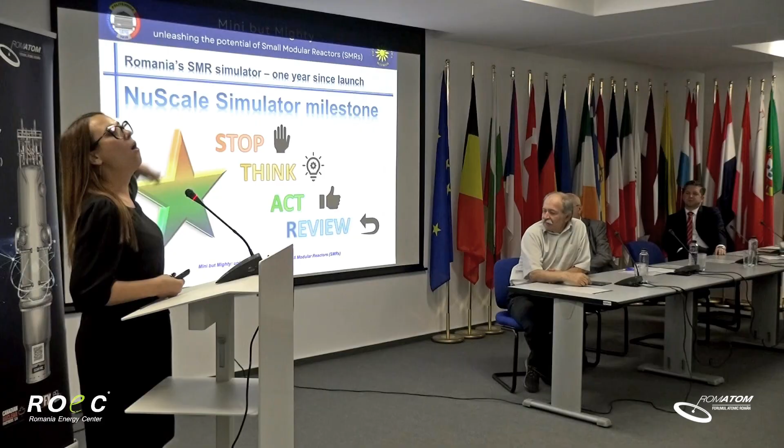We are currently reviewing what we've done well and what we've done in the wrong way, let's say. So we basically reviewed our courses. We also took some feedback from our students, and we are going right now from the beginning, also stopping, thinking, acting, and then reviewing again, doing this every year.

So what we've noticed after 1 year of using the simulator, we've seen some improved skills, so hard skills and also soft skills. The things that I will be talking about are based on our students' feedback. So on the reactor design, it's way easier to understand a new design, and not only a new design, a current design, like an operating design, if you work with the simulator with a real-time simulation environment.

Also, they improved their knowledge of thermohydraulics. It was really hard for us during the master courses. I personally teach RELAP/SCDAPSIM for master students. And I can tell you it's really hard for the students to get familiar with the code, get familiar with how to build an input model for simple thermohydraulic analysis. And now with the simulator, we have the opportunity to show them that their model and their results could be verified through the simulator.

Also, improved knowledge on safety, because the simulator is showing all those buttons that are the primary safety functions in the NuScale design. And every time we run a transient or an accident scenario, it's way easier to see in the simulator when a safety function is challenged. And one other thing is the fact that the simulation is basically the base of the knowledge, the base of the results that we got from, let's say, plant response. So these hard skills are way more improved than we saw in the previous generations.

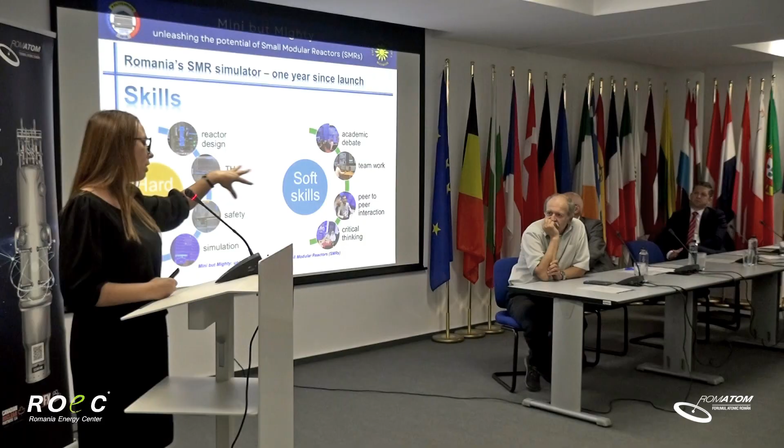Also, the soft skills. As you can see, there are some pictures from the simulator, pictures with our students. They were engaged in academic debates. They were also working as a team. We grouped them into groups of 4 or 5 people, and they worked together to solve an issue. They are also not very used to interacting with each other or learning from each other. So the simulator encouraged them to learn peer-to-peer, to learn from their peers. So it encourages peer-to-peer interaction and also critical thinking.

So the main conclusions after 1 year, based on, let's say, an estimation: we have an increased number of diploma projects focused on SMRs, mostly on the NuScale design since we have the simulator. Also, we've doubled our number of candidates for the nuclear engineering master program. And let me just underline something. When I was a candidate to the nuclear engineering program, we were like 15 candidates on 30 places to be enrolled in the nuclear engineering master program.

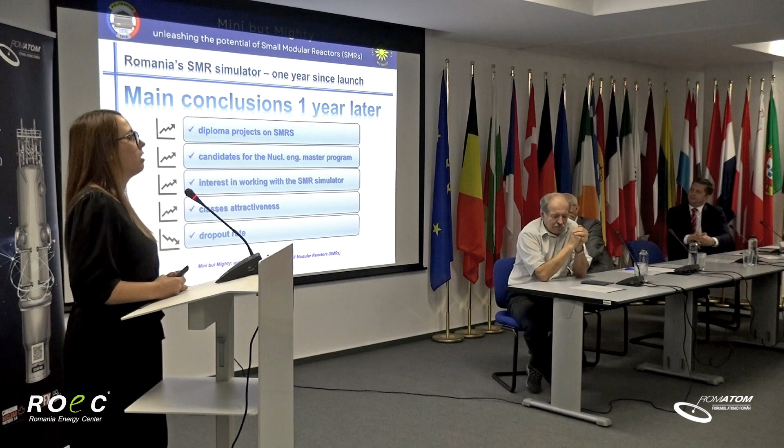So comparing 2022 to 2023 and 2024, we've doubled the number of candidates for the nuclear engineering master program. That's because of the simulator. So the interest of the students has increased for the nuclear engineering section due to the simulator.

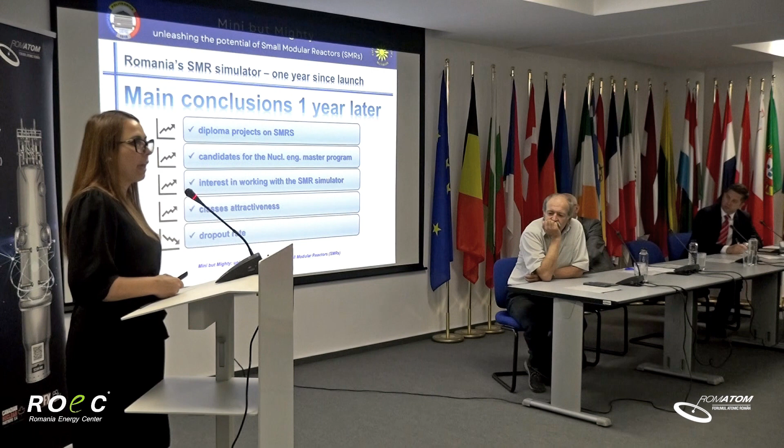Also, we've seen an increased interest in working with the simulator, and we are currently having one candidate for an entry engineer at Politehnica University in our nuclear engineering division. And also, we've seen that the class attractiveness has increased.

So we have an increased number of students participating in classes because, as you know, attendance is not mandatory. So they basically understand something like, well, classes are not mandatory, just the faculty if we want to finish the studies. So it doesn't matter if I go to classes or not. At the end, I just have to take the exams. But now we've seen that the presence at classes has increased.

Also, one very important thing is the fact that the dropout rate has decreased significantly. Let's say we were around 33 students in the nuclear engineering specialization in 2013, and we ended up on time, so basically defending our diploma at the end of the fourth year, around 13.

And now from the 60 students that we've got enrolled in 2024 in the fourth year, we have around 80% that are going to defend their undergraduate diploma. So the dropout rate has decreased significantly. So this is the main, let's say, overview on the last year regarding the simulator.

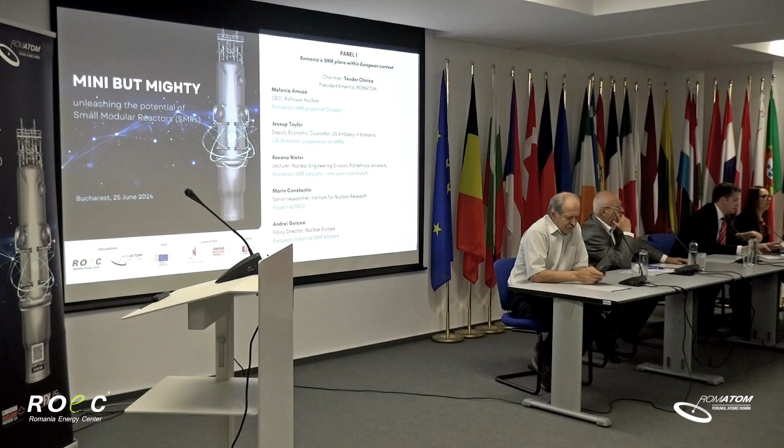We have to thank the Department of State of the United States. This was for Romania. For the future, that will depend on the purposes we are going to have. At this moment, we are looking at the terminal from Politehnica to RoPower headquarters. Just to clarify, the simulator itself was a donation, but the cost of bringing it and installing it came from the Department of State in Washington.

And also, just a side note that there are 4 NuScale simulators at universities in America, and there are 2 overseas, one here and one in Korea. The one here was the first one that was installed overseas.

And to catch up with your question regarding the improvements that will be done to the simulator in the United States, the NuScale company said that any improvement done to the United States simulator will also be available for Politehnica University. If you do not know about it, we are basically running the simulations through an internet connection, through a server in the United States, in Oregon. Thank you.

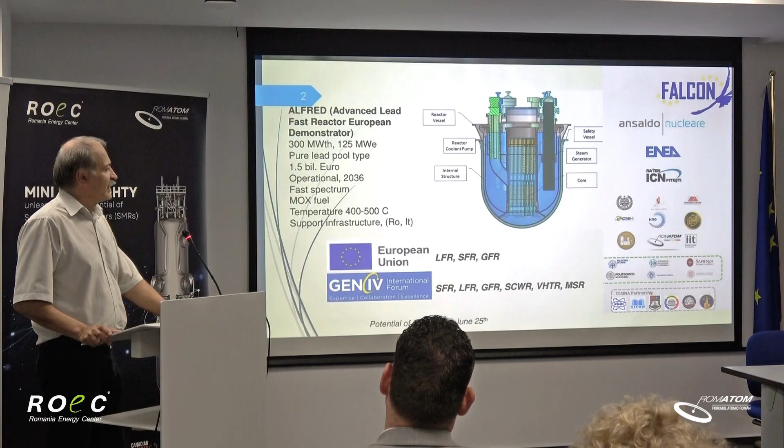We started this kind of activity in 2005, not for SMR first, but for lead-fast reactor technology. Lead-fast reactor technology was very important, and we received financing from the European Union due to the fact that we can burn the waste. This is very important, the minimization of the waste and solving a great issue of the nuclear. Therefore, we started to work in 2005 for a reactor of 600 electric megawatts. The name is ELSY. At that time it was the optimal size for the European grid, and later we were thinking, reflecting, and understanding that the SMR is not only a promising solution, but it is a very practical way to adapt to the changes in the grid and in the energy market.

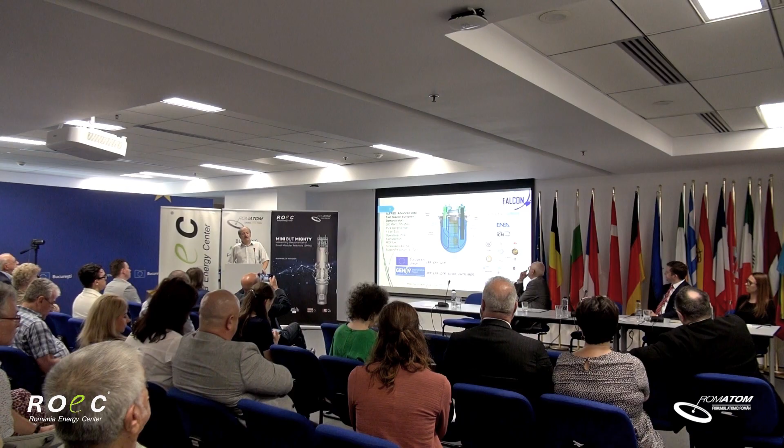What is ALFRED? ALFRED resulted from this effort as a demonstrator. We wanted to build a demonstrator for lead-fast reactor technology, and the demonstration was in terms of economic viability and technological viability. Therefore, the intention is to connect ALFRED to the grid, 125 electric megawatts. That is important, and it is in the size of SMR. And the total effort of this investment was estimated at that time at 1.5 billion euro.

From the point of view of the configuration, we have an integral type, like in integral PWR. That means we have a reactor vessel. The core is very small, less than 1 cubic meter of high enriched fuel. We used mixed oxide fuel, that means uranium and plutonium combined. And the steam generators and decay heat removal systems are directly inserted into the reactor vessel. That means a very simplified primary circuit without any pipes, reducing the risk for LOCA accident.

Comparing with the project from Doicesti, here we have a fast reactor. That means we are using fast neutrons. We don't need the moderator. And we use higher temperature. Actually, the reactor is designed to work between 400 and 500 Celsius degrees.

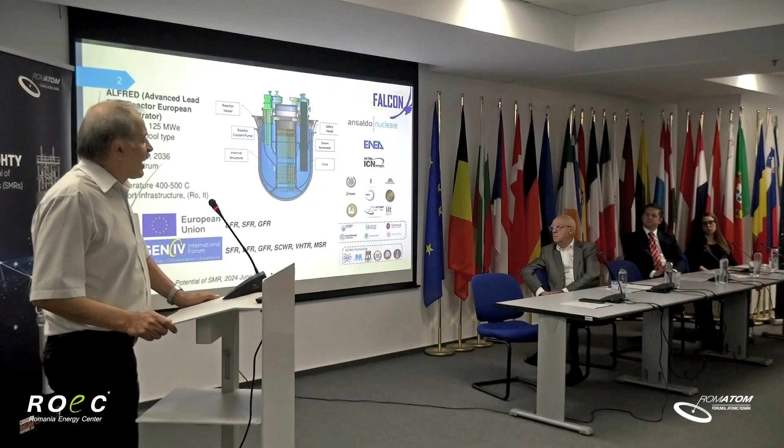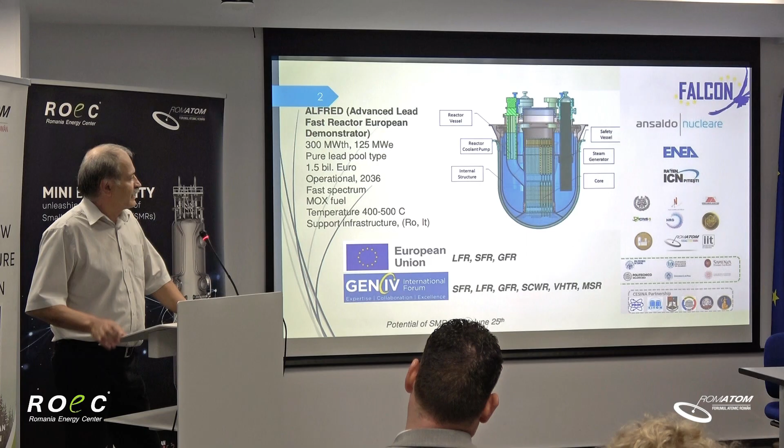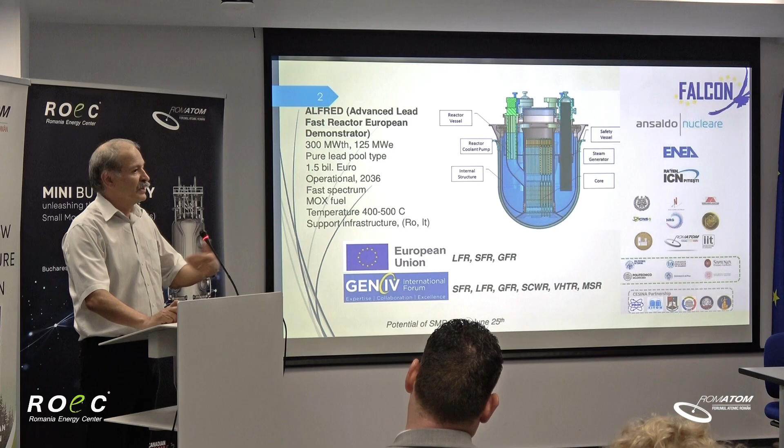We are working in an international context. We have an international consortium. The name is FALCON, Fostering ALFRED Construction. And we are 3 organizations, Ansaldo Nucleare and ENEA from Italy and RATEN ICN from Romania, in this consortium set up in 2013. We have important memoranda of understanding signed with different organizations. You can see here also ROMATOM in this collaboration, trying to collaborate with different partners to develop this technology. Also, we have good partnership with the universities because we try to involve universities in this long-term development.

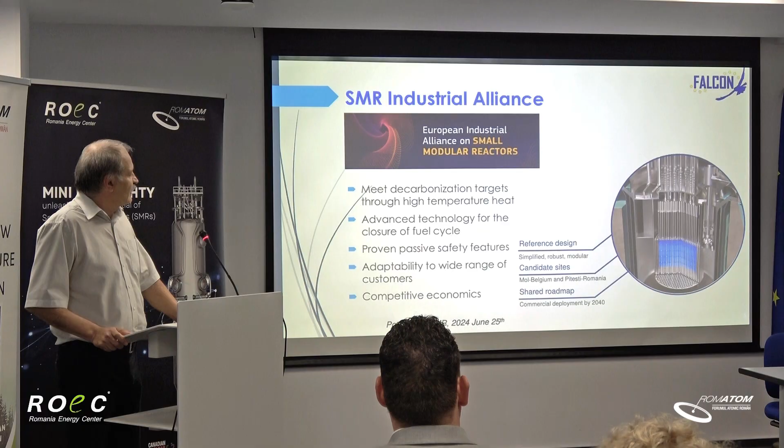Now, this year, we applied to the SMR Industrial Alliance and introduced our application, reference designed, simplified, robust, and modular, for this kind of LFR technology. And we have 2 candidate sites, one in Pitești in Romania for ALFRED, and the second one in Mol in Belgium for a precursor, a very small reactor to demonstrate the fuel part. The reactor for testing the fuel is around 5 megawatts.

Going further, in the last years we tried to enlarge this collaboration, bringing in Belgium. Belgium was deeply involved in the development of lead bismuth technology, which is very close to lead technology. They are involved in the MYRRHA project, which is directly oriented to partitioning and transmutation of the waste, but some changes in the governmental vision and roadmap offered the possibility to go to small modular reactors. Therefore, we decided 2 years ago to be together and put the money together for SMR development in LFR technology. At this moment, Belgium allocated an investment of around 100 million euro for the next 4 years.

And Romania, at the same time, has an important project to develop the infrastructure for the licensing. We are in the final phase for the first 2 important experimental facilities, ATHENA and ChemLab.

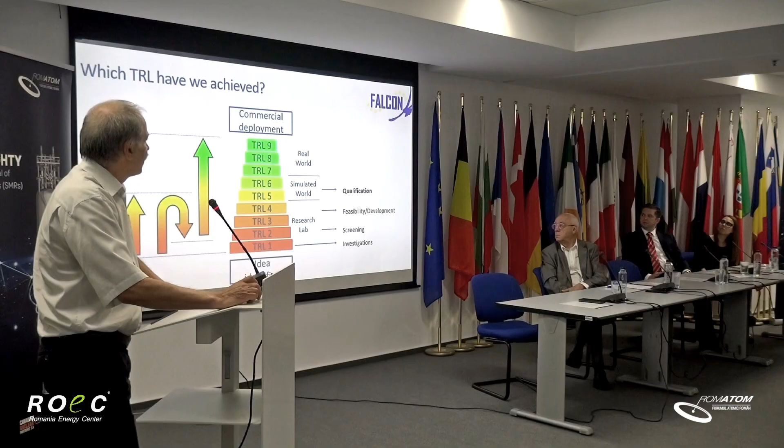In terms of technological readiness level, where we are at this moment: we are developing a technology, compared with the Doicesti project, where we have a very mature technology. Here we are in development. Our appreciation is we are somewhere at level 5, 6. This level is practically the qualification level. We have to qualify the materials, the components, the system, and to test all these elements in this experimental infrastructure that we are building in Pitești.

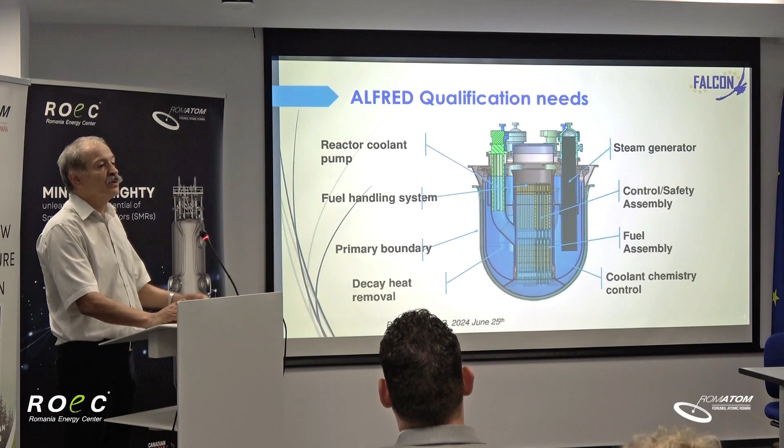Here you can see some qualification needs for ALFRED: the pumps, the fuel handling system, the decay heat removal, steam generators, the coolant chemistry, and so on. Therefore, we have a lot of work to do for this qualification, and this is the status.

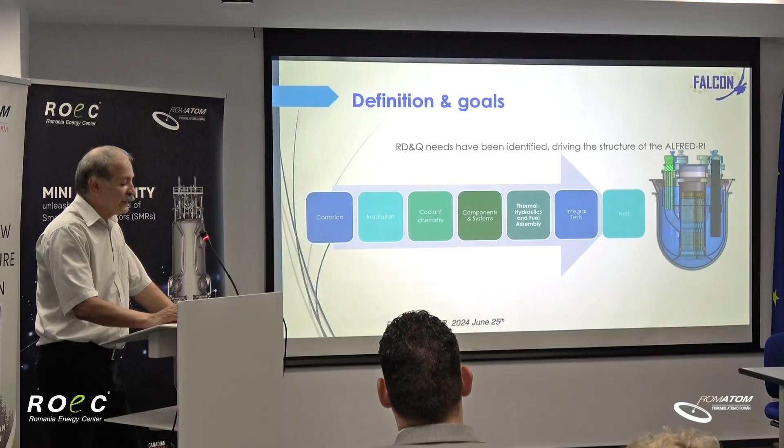Here you have some elements from research and development. We identified some open issues. We have to develop a solution for these open issues. For example, the lead environment introduces difficulties in terms of the materials that we are using, in terms of corrosion and erosion, and in terms of the thermal hydraulics, stratification of the coolant, and so on.

Also, we have to work on the fuel, but finally, we have to perform integral tests in order to demonstrate to the regulator we are fully controlling all the phenomena in this kind of system.

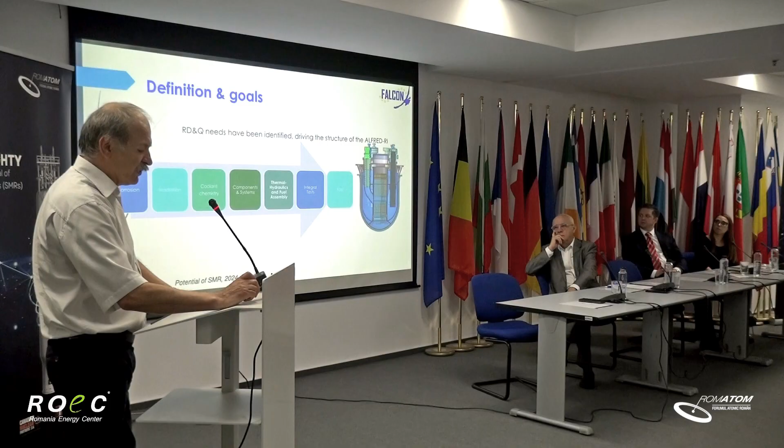In these years, we identified what we have to build in terms of experimental infrastructure, starting with the existing experimental facilities in Italy. The first group is long-term operated in Italy, and these facilities offer an important possibility to perform some tests. There are at the moment other facilities in Belgium. Last year we had this agreement and we can practically use these facilities in common.

But beyond this possibility in Italy and Belgium, we identified some gaps and tried to build some new large facilities to cover all the needs for the licensing process. This resulted in these 6 large facilities. First, in the first photo on the right is Athena and ChemLab. The project is close to being finalized.

Athena is a big pool with lead, the largest pool in the world at the moment. We have more than 800 tons of liquid lead in the system. And ChemLab is the coupled chemistry laboratory. We investigate there the chemistry of lead and the chemistry of the cover gas.

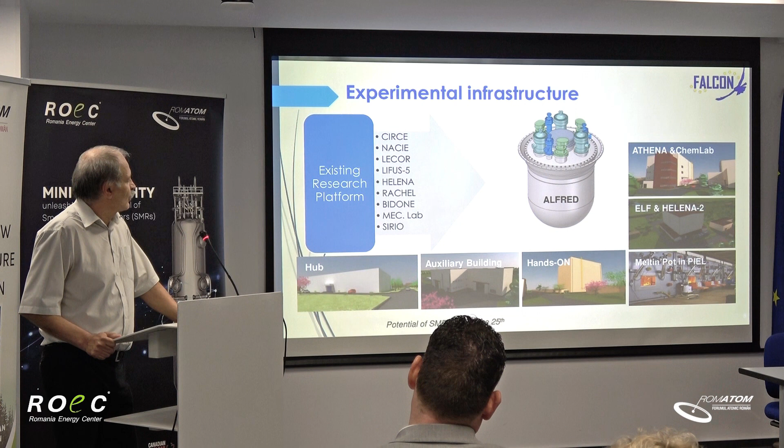And another important facility is Hands-On, devoted to fuel handling, because fuel handling is quite different. We have an opaque environment. Lead is not transparent, and also we have a lot of challenges in terms of burn-up and so on. All of these facilities are in construction or projected, others to be built in the next years.

The money we received is European money from structural funds, and future money is also from Europe in order to build this infrastructure.

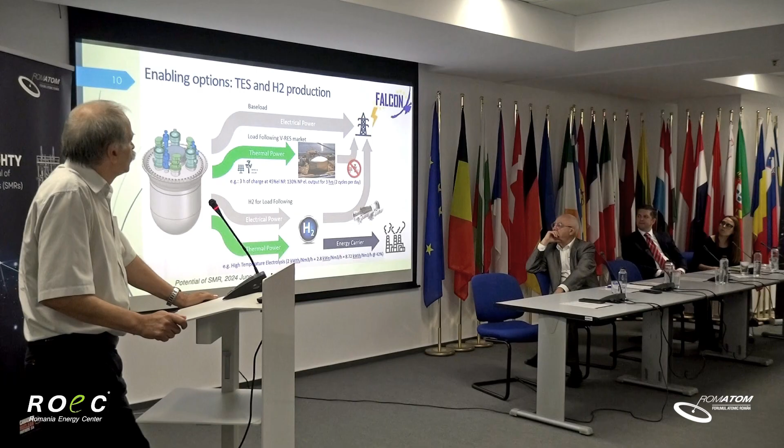Another important element is the adaptation of our system to the market. Practically, we are very interested in this flexibility of the system. We have the same flexibility as an integral PWR, but we have better performance in terms of dynamics. We do not have such big issues in terms of reactivity coefficients, oscillation of poisons, and so on.

But due to this great development of renewables, we are thinking of thermal storage, which is the most practicable option in this case to store electricity, and also of hydrogen production, hydrogen for load following.

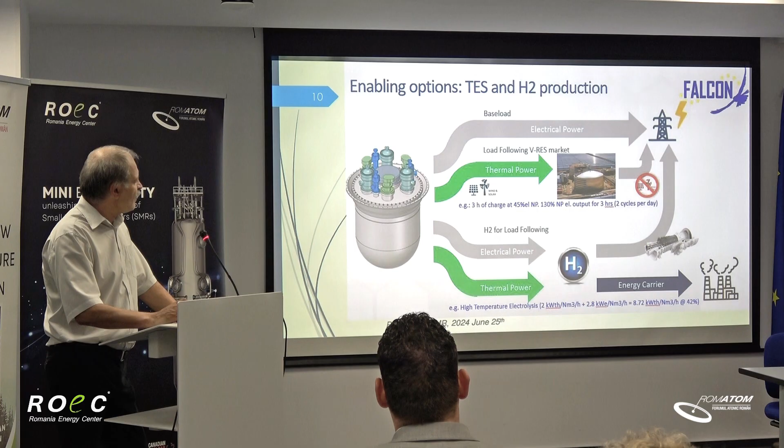Going to the final, I want to say some advantages of our technology. The most important advantage is this optimization for the waste. We are able to burn the minor actinides, and by multiple reprocessing, practically we can reduce a lot the final disposal for the fuel.

We have an amazing increase in the efficiency of the use of natural resources due to the fact that we are using uranium-238, not uranium-235. And in terms of the safety and reliability, we have the same target to eliminate the need for off-site emergency response, as in the Doicesti case. We have some cost advantages and some very interesting elements from non-proliferation and physical protection,

because this is an unattractive route for diversion or theft of the weapons-usable materials. We are combining practically the advantages of this technology with advantages of SMRs in terms of flexibility and adaptability, the modular construction, the lower EPZ, and the presence of the passive system.

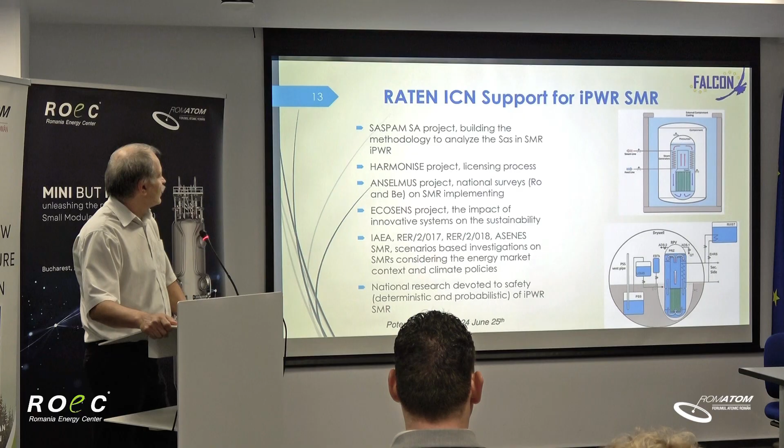And we are preparing at the moment a national survey for public attitude toward SMR implementation in Romania. The survey will be practically applied in parallel in Romania and in Belgium. We will have the results next year, and they will be, I hope, interesting. We have another project, ECOSENS, where we investigate the impact of this kind of system, including SMR, on sustainability.

And we perform a lot of research together with other partners in projects supported by the Vienna Agency, investigating diverse scenarios based on SMR in the context of our country, considering the evolution of the energy market and climate policy. In the national research, we have a separate part devoted to integral PWR SMR. Most of the effort was devoted to deterministic and probabilistic safety assessment. This is all I wanted to present you. Thank you. Questions?

Thank you very much. Are there questions? To better understand the comparison, that reactor is the integral pressurized water reactor. What does integral PWR mean? Because NuScale, I mean the Doicesti project, the reactor is exactly this one on the poster that we have. What's the difference?

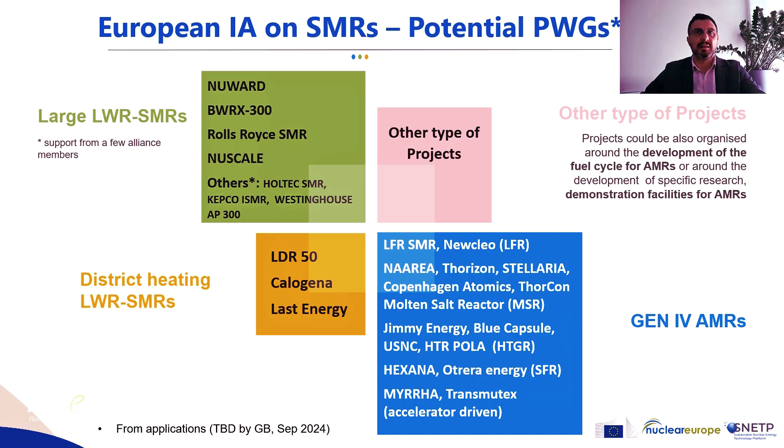The 8 technical working groups proposed are covering different topics, and 4 of them will start or started the work right away, now in June. Please note that, as part of the active involvement in the work of the Alliance, Nuclearelectrica is holding right now the vice chairmanship of the Technical Working Group 6 on nuclear safety and safeguards. List of potential projects: additional information needed to be submitted by the end of June by these applicants, and the decision will be communicated by the end of September by the Alliance.

As timeline, as I said, we are currently working to kick off the first technical working groups, but I will highlight here some very important milestones. First is the technology roadmaps that should be ready by the end of the year. And the second one is the strategic action plan that should be ready in the first quarter of 2025, based on the action plans set by all technical working groups.

And with this, I would like to close my presentation, not before mentioning that the second call for members for the Alliance is open. More information can be found on the official page.